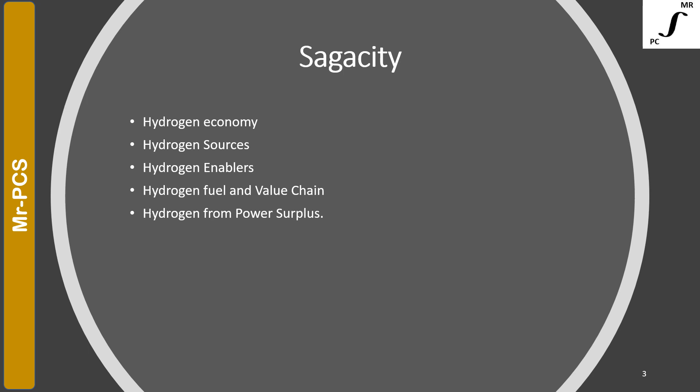It is also interesting to understand how hydrogen is compared with natural gas and what challenges it imposes on the entire value chain. After this basic knowledge, it will be easier to grasp why there exists linkage between hydrogen and surplus power produced by renewable energy sources. We thereafter shift our focus to understand how hydrogen will impact the economy. We will review a few parameters as forecasted by IEEJ on Japan's economy for the year 2050 with and without hydrogen introduction.

The transition from fossil fuel to low emission fuel will also mean new business models to enable this transition, and we will review some of those details in this section. And then the last two sections are all about the short-term outlook for the next 10 years, and then we will conclude with a one-page high-level summary.

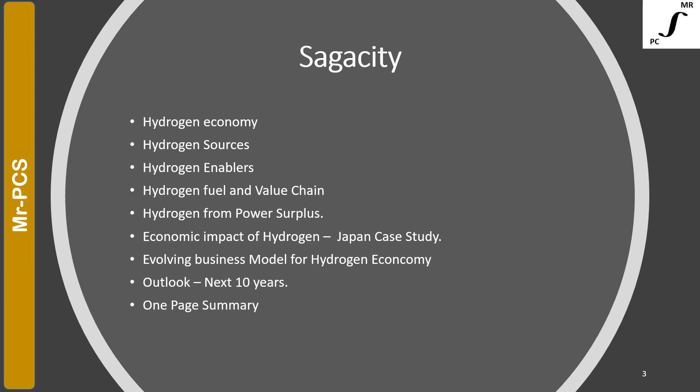The first section is about hydrogen economy. Let's review the definition of hydrogen economy. The term economy is defined as the state of a country or region in terms of production and consumption of goods and services and the supply of money. When the economy is referred to with respect to hydrogen, it means use of hydrogen as a low carbon fuel, particularly for heat, but also for hydrogen vehicles, seasonal energy storage, and long distance transport of energy.

This, in a sense, means significant usage of hydrogen in our daily life, and then it becomes an essential parameter to drive the country's economy. The prospect for hydrogen economy is also due to global warming, which calls for transition from fossil fuel to zero emission alternatives like hydrogen. Pure hydrogen-based technologies offer negligible emission.

The term hydrogen economy was coined by John Bockris during a talk he gave in 1970 at General Motors Technical Center. The concept was proposed earlier by geneticist J.B.S. Haldane. University of Michigan has proposed hydrogen economy to nullify the negative impact of hydrocarbon fuel, as fossil fuel releases carbon to the atmosphere, which results in greenhouse gases.

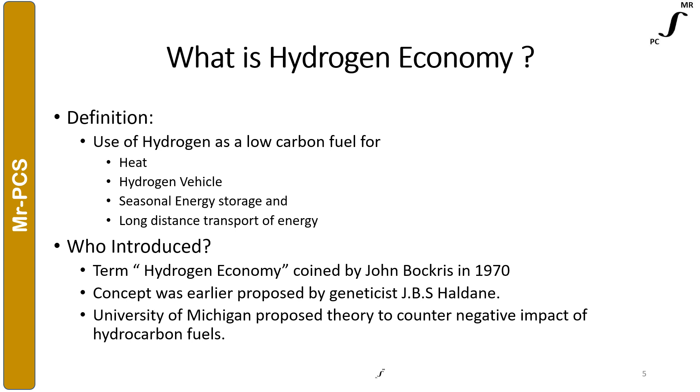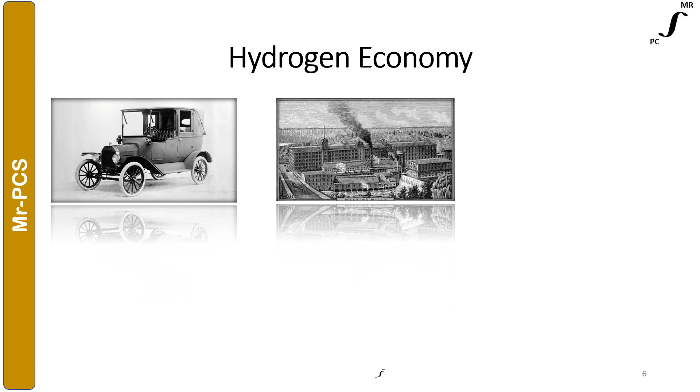In 1900, conventional cars were developed, but there was no infrastructure for gasoline. Yet the conventional car became a success due to improving transport efficiency, which resulted in economic growth, and the infrastructure was then developed to meet such demand. Today we are in a situation where the economy is dependent on fossil fuel, which is finite, and life is unimaginable without fossil fuel. However, all this is resulting in global warming for the planet Earth.

Hydrogen is abundant on planet Earth and it can be produced from multiple sources. It's an energy carrier and not an energy source, and can be used for powering vehicles as well as industries and residences. So, what's stopping us from using hydrogen if it is the most abundantly available resource in the universe? The challenge is to produce it economically and in an environment friendly manner.

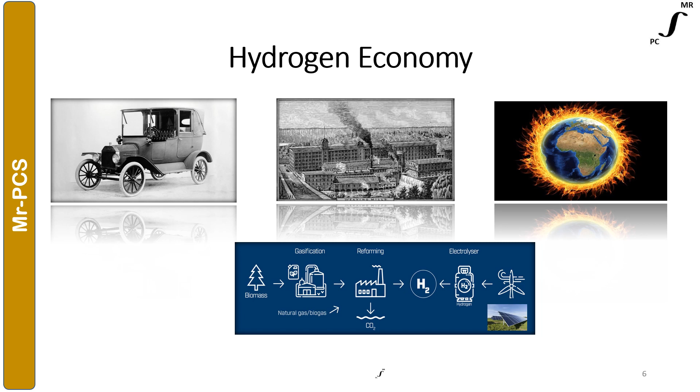The next few slides will address some of these questions: how hydrogen is produced, how it is transported, how it will impact the country's economy, and what we see in the next 10 years. Hydrogen is abundantly available in the universe. In this section, we will review the most common ways of deriving hydrogen from other sources.

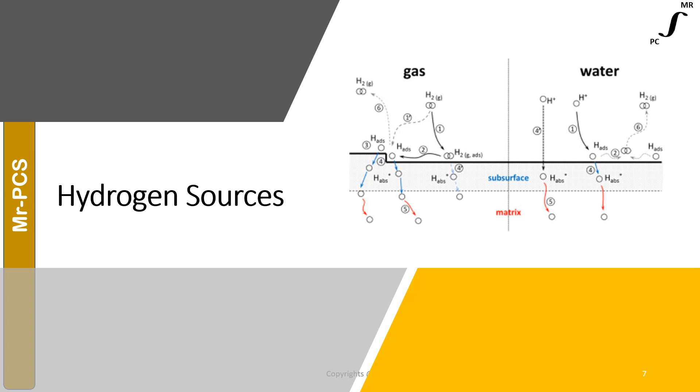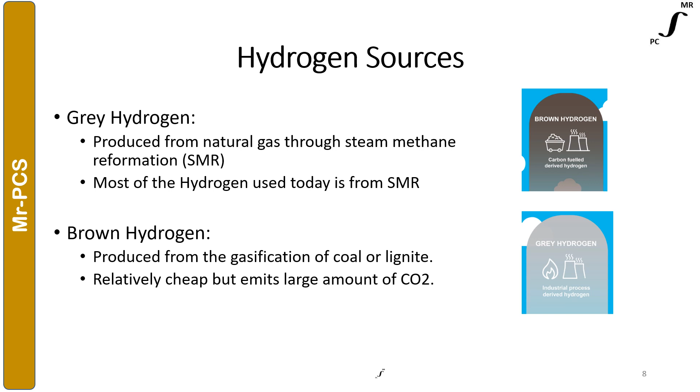The sources for hydrogen production are as listed in this slide. The first and the most common way to generate hydrogen is steam methane reformation. Most of the hydrogen produced today is through steam reformation methodology. Hydrogen produced this way is called gray hydrogen. The next category is called brown hydrogen. In this methodology, hydrogen is produced through gasification of coal or lignite. This is a relatively cheap way to produce hydrogen, but it emits a large amount of CO2.

Blue hydrogen. In this methodology, hydrogen is produced through natural gas, and coal is also included. This method results in emission while generating hydrogen, which needs to be taken care of through carbon capture technology. Green hydrogen is the cleanest form of hydrogen. It is produced from the electrolysis of water. The entire process is powered through renewable power sources like solar or wind, which have zero carbon. It is clean and the most ideal way, but also the most expensive way of producing hydrogen.

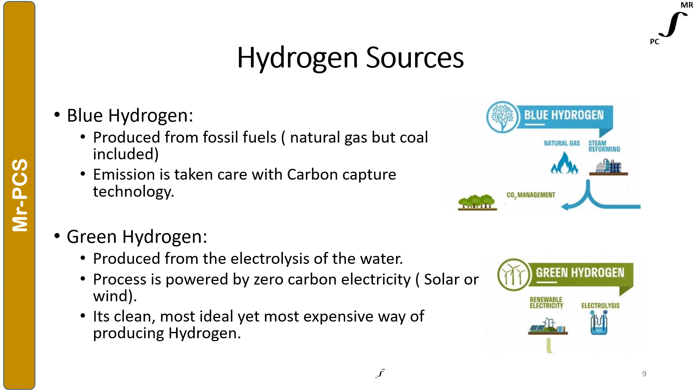As seen in the earlier slide, hydrogen can be produced from fossil fuel and biomass or from water and various other sources. This slide further provides additional information on hydrogen sources.

Natural gas is the most common source of hydrogen production, and steam methane reformers are generally employed to produce hydrogen for industries and refineries. As of today, 75%, which is around 70 million tons of hydrogen, are produced using 205 billion cubic meters of natural gas, which is 6% of global natural gas use.

Coal comes next due to abundant availability in China. Hydrogen produced through coal gasification accounts for an estimated 23% of global hydrogen produced and uses 107 million metric tons of coal, which is 2% of global usage. Biomass and electricity account for the remainder of hydrogen production.

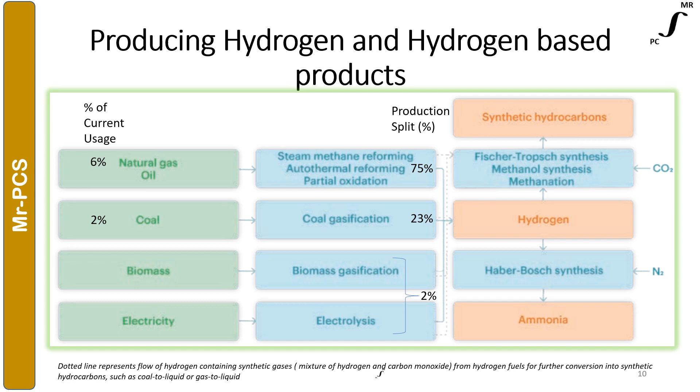The process of making hydrogen through steam reforming technology is mentioned in this slide. Steam methane reforming, abbreviated as SMR, is the most common technology to produce hydrogen from natural gas at large scale. SMR is likely to remain the dominating technology even in the near future because of favorable economics and the large scale of steam methane reforming processes in operation as of today.

High temperature steam around 700 to 1000 degrees Celsius is used to produce hydrogen from methane sources such as natural gas. Methane reacts with steam under 3 to 25 bar pressure in the presence of a catalyst to produce hydrogen, carbon monoxide, and a relatively small amount of carbon dioxide. Steam reforming is an endothermic process, meaning heat must be supplied to initiate the reaction.

Subsequently, in the water-gas shift reaction, carbon monoxide and steam are reacted using a catalyst to produce carbon dioxide and more hydrogen. In a final step, pressure swing adsorption, carbon dioxide and other impurities are removed from the gas stream, leaving essentially pure hydrogen.

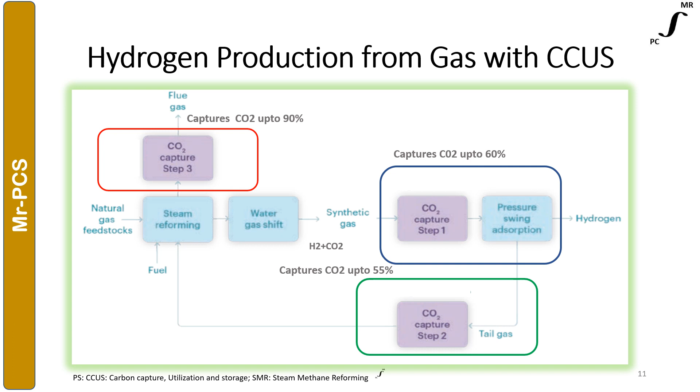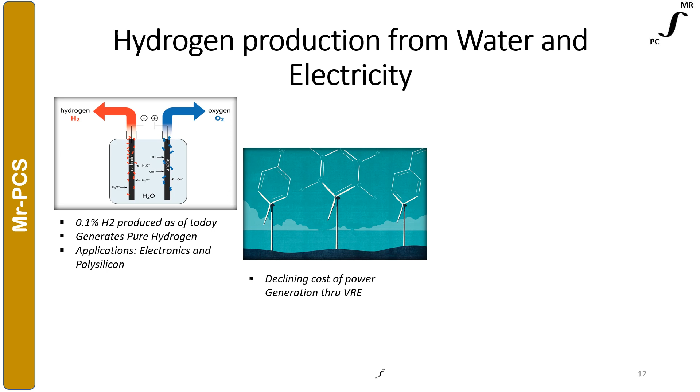Declining cost of electricity produced through renewable sources like wind and solar offers the opportunity to produce hydrogen at lower price, as this surplus low cost power is used for electrolysis to generate hydrogen. Around 9 liters of water can produce 1 kg of hydrogen and 8 kg of oxygen, which can be used for healthcare and industrial sectors.

This means for producing today's hydrogen consumption of 70 million tons of hydrogen, it will need 617 million cubic meters of water, which corresponds to 1.3% of water consumption of the global energy sector as of 2019, or roughly twice the water consumption for hydrogen through SMR, which is around 345 million cubic meters.

Considering the huge water consumption, generally sea water is used for producing hydrogen instead of fresh water. Electrolyzer technologies like alkaline, proton exchange membrane, and solid oxide electrolysis cells are used to produce hydrogen.

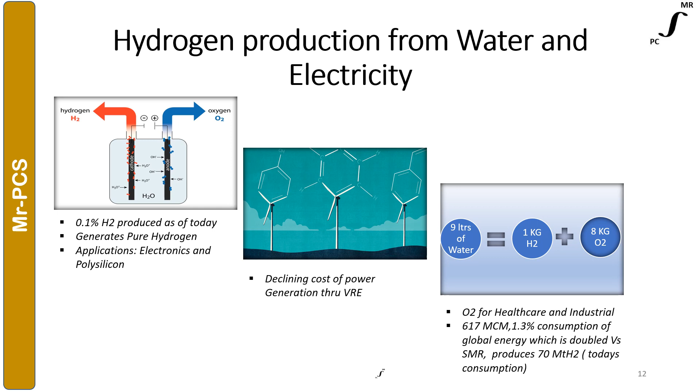Hydrogen production results in CO2 emission of about 19 tons of CO2 per ton of hydrogen, which is twice as much as natural gas. It is necessary to use carbon capture technology if hydrogen is generated through this process. Hydrogen to carbon ratio is low, around 0.1 to 1, as against 4 to 1 from methane. This low ratio brings challenges for CCUS, as the gas also has other impurities like sulfur and nitrogen.

The synthesis gas obtained from the gasification of coal could be used to fuel a combined power plant, and when used with CCUS, it can produce low carbon electricity. When water gas shift units are added, synthesis gas can be used to produce more hydrogen. The decision to produce hydrogen or electricity could be taken based on the profitability, which is based on demand.

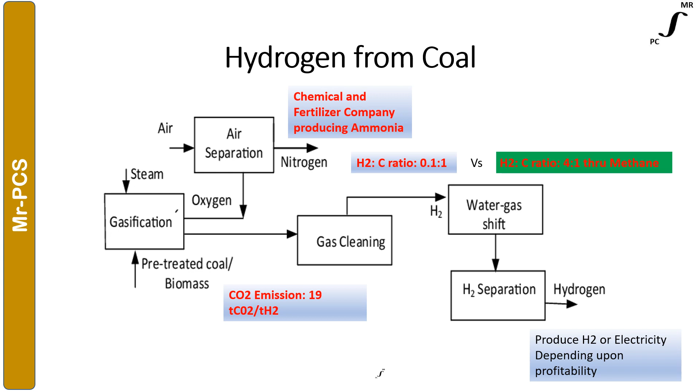The biogas is treated again to produce hydrogen. This process of generating hydrogen is expensive as compared to solar or wind-based electrolysis methodology. Hydrogen production from biomass with carbon capture and storage would result in negative emissions, which will play a significant role in future.

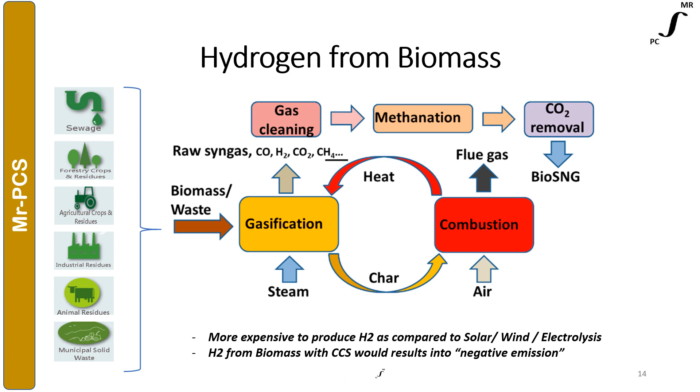Hydrogen safety: hydrogen is colorless, odorless, and tasteless. This means specific sensors or odorization is needed to sense hydrogen in our surroundings. Gas network collaborators are working to create guidelines for injecting hydrogen into natural gas pipelines. Work has already started to define safety standards for hydrogen within homes, determining hydrogen purity for residential and industrial usage, safe ways of producing hydrogen, and defining safety protocols for transporting hydrogen.

Another factor is carbon capturing and storage. Mass production of blue hydrogen is dependent on the use of carbon capture and storage technology. As of now, 23 large-scale facilities are operational all over the world, capturing 40 million tons of carbon per year. Deploying CCS at large scale will make blue hydrogen production attractive for natural gas producers. As of today, it is cheaper to release the carbon than to capture the carbon.

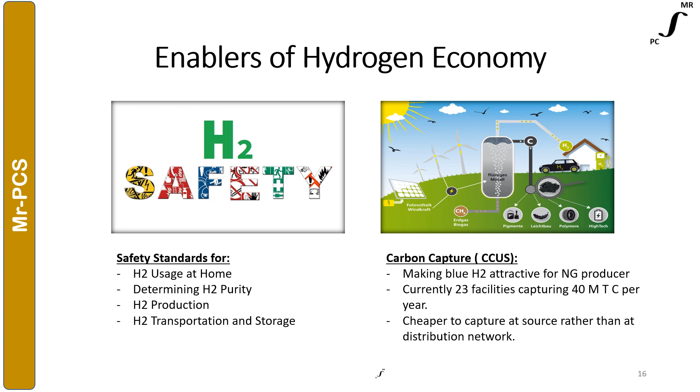Another important factor is building infrastructure suitable for hydrogen usage. Hydrogen may need to be operated at different pressure, and it may have adverse impact on equipment material. It may be needed to check the compatibility of the equipment with hydrogen gas, and all this means more research and investment in infrastructure.

As per Hydrogen Council, around $280 billion investment is needed till year 2030 to realize the full hydrogen role in energy transition. It is estimated that around 40% of investment will be towards hydrogen production, around 30% into storage, transport and distribution, 25% for product development and manufacturing, and the balance towards developing an entire new business model to support this transition.

Many countries use natural gas for various applications, and its infrastructure can be modified to use hydrogen. This will avoid investment towards building separate infrastructure for hydrogen. It is estimated that even blending 5% hydrogen into natural gas will significantly boost hydrogen demand and could spur further investment.

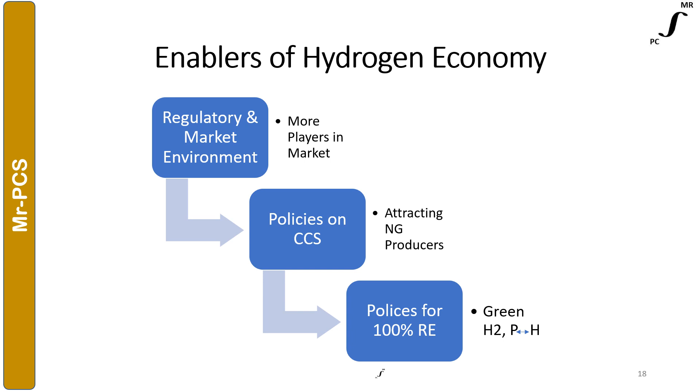In this section, we will see how hydrogen is compared with respect to natural gas, and what are the possible ways of collecting and bringing hydrogen to the market.

Hydrogen-based fuel and feedstock can be produced from any source of hydrogen, whether electricity, biomass, or fossil fuel. Ammonia is like a chemical feedstock, or can be used as a fuel, which is made up of hydrogen and nitrogen.

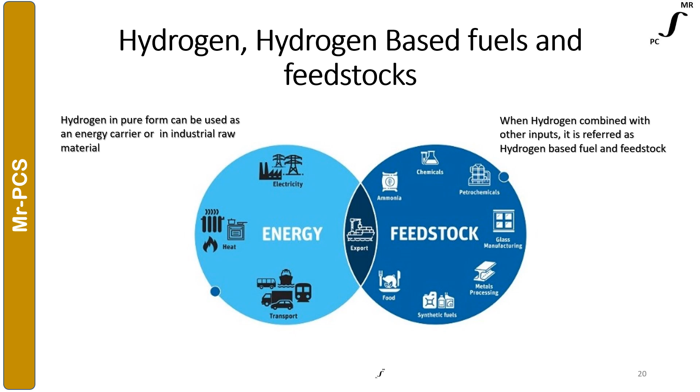Let's understand the hydrogen gas properties with respect to natural gas. Hydrogen contains more energy per unit of mass as compared to natural gas or gasoline, making it attractive for the transport sector. Energy per unit of mass is around 120.1 megajoule per kg, and that's the LHV figure, which is 3 times that of gasoline.

Hydrogen is the lightest element and has low energy density per volume, which means more hydrogen needs to be moved to get equivalent energy from other sources. This can be achieved using larger or faster flowing pipelines and larger storage tanks.

Energy density of hydrogen is one third of natural gas. Hydrogen is just 1/10 of natural gas comparing gas density, and 1/6 of natural gas considering liquid density. The density of liquid hydrogen is 70.79 kg per cubic meter at minus 253 degrees Celsius at 1 bar.

Hydrogen can be compressed, liquefied, or transformed into hydrogen-based products that have higher energy density, but this transformation consumes some of its energy. The boiling point of hydrogen is 90 degrees Celsius below LNG, which stands at minus 252.76 degrees Celsius at 1 bar.

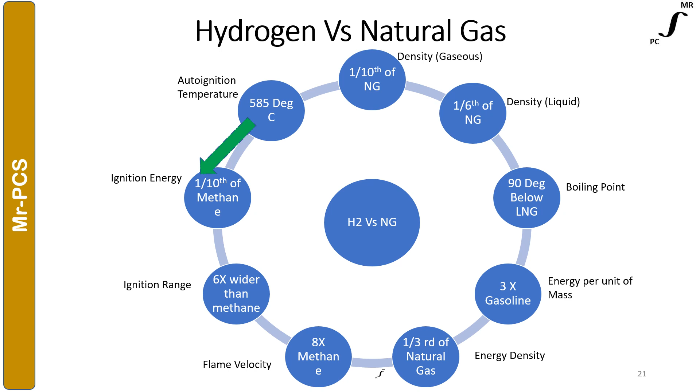Various options with underground facilities are available to store hydrogen. Long distance transmission is extremely difficult due to lower energy density. Compression, liquefaction, or incorporation of hydrogen into higher molecules are the possible options being explored for long-distance transmission.

Blending hydrogen into natural gas infrastructure will reduce the investment in building infrastructure as well as boost the consumption of hydrogen. For overseas transportation, hydrogen has to be liquefied or transported as ammonia or liquid organic hydrogen carriers.

Pipeline is the cost-effective way of transporting gas for high consumption. The current style of transportation through trucks carrying hydrogen as a gas or liquid will remain the main distribution channel for the next decade. In some countries, it will be cheaper to import hydrogen rather than produce it in-house.

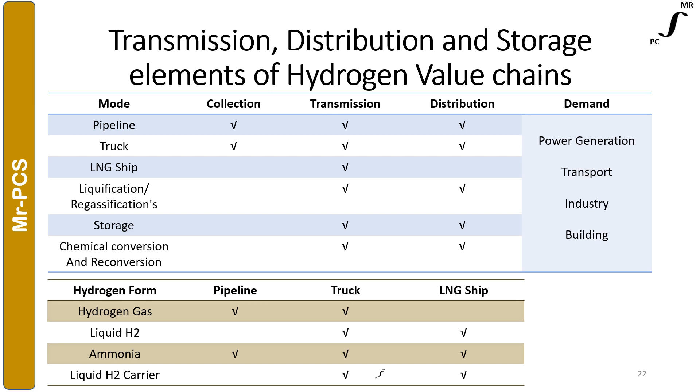In this section, we will analyze various scenarios for utilizing surplus power when demand doesn't exist.

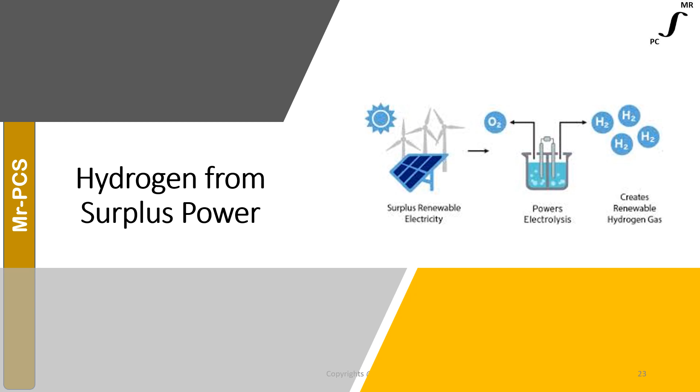Challenges with surplus power are immense. Variable energy sources like solar and wind generate power depending upon whether sun is available or wind is blowing. The energy thus produced is irrespective of demand. The energy produced at zero cost may need to be curtailed if demand doesn't exist. There's also a chance that demand exists but variable energy sources are not in a position to generate power. Hence, the most obvious action is to store excess power produced and utilize it when demand exists.

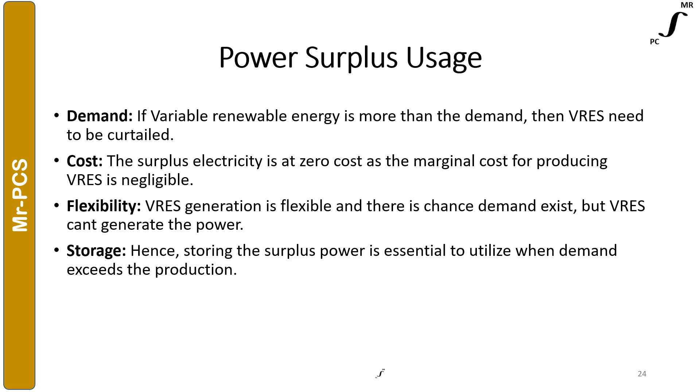The options are: no conversion, which also means wasting the energy produced when demand doesn't exist. Second is convert surplus power to heat. Third is store the power. Fourth is convert surplus power to hydrogen.

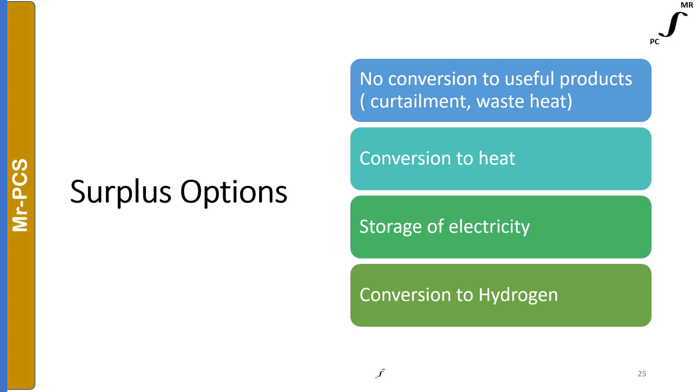Let's first explore the option of storage of electricity. To understand this concept, we need to be aware of energetic cost. Energetic cost means total amount of fuel and electricity required to build and operate the storage technology.

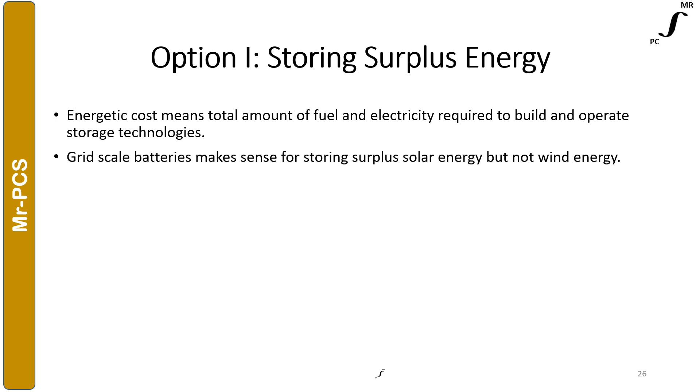Based on research done at Stanford University, solar power can be stored for grid-scale batteries, but the same option is not so attractive for wind power. The reason is batteries with high energetic cost consume more fossil fuel and therefore release more carbon dioxide over a period of lifetime. The amount of energy required to build a solar farm is equivalent to building each of the five battery technologies.

Storing surplus wind energy negatively impacts energy return on investment up to 20% for lithium-ion batteries and up to 50% for lead-acid batteries. Higher battery life would improve energetic performance and will make energy storage options attractive.

With this as a background for storage options, let's analyze the levelized cost of energy for heat options versus energy storage options. In our next slide, we will review levelized cost of energy for heat options versus energy storage options.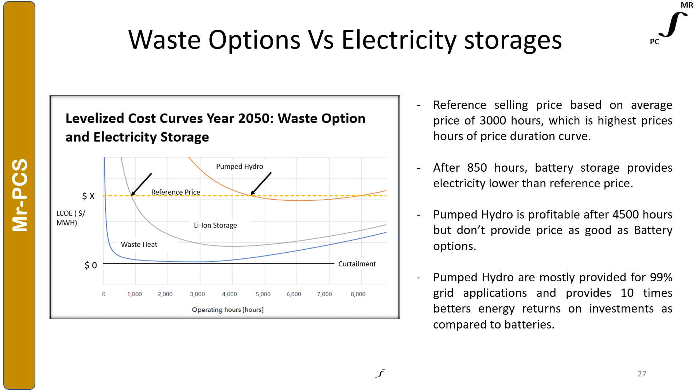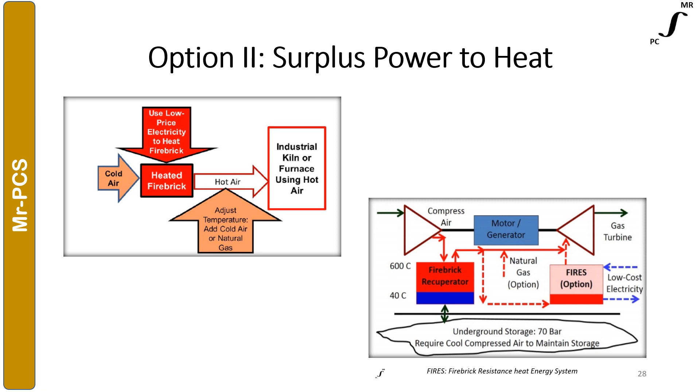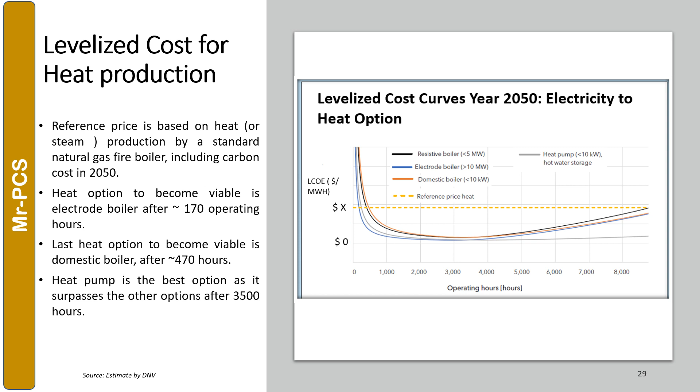This slide shows levelized cost calculations for heat production. Reference price is based on heat or steam produced by natural gas boiler including carbon cost prices in year 2050. Heat options like electrode boiler become viable after 170 operating hours. The last heat option is the domestic boiler, which becomes viable after 470 operating hours. Heat pump is the best option as it surpasses after 3500 operating hours.

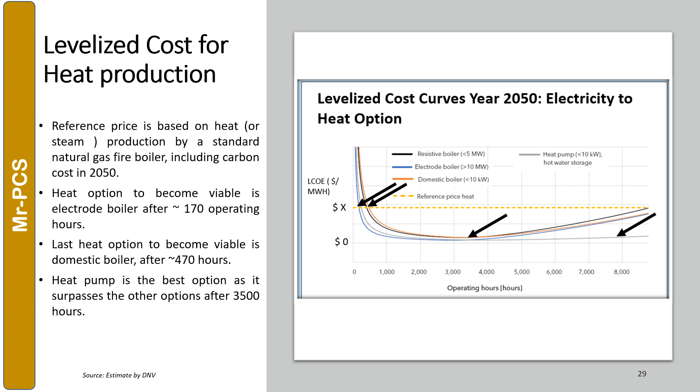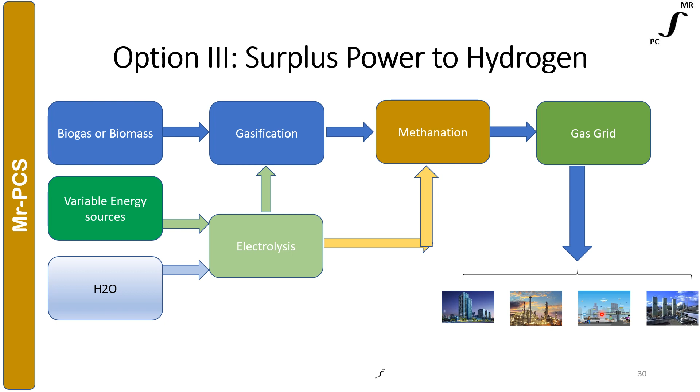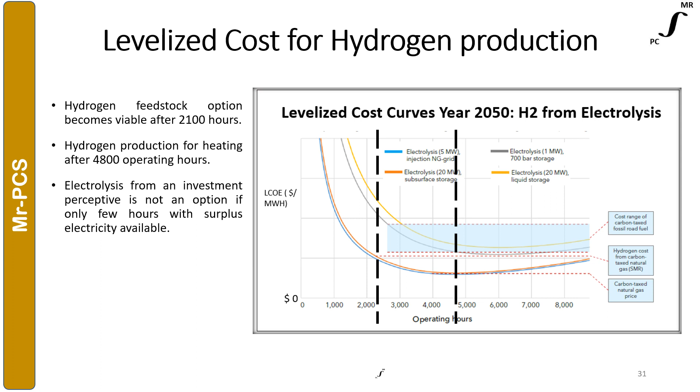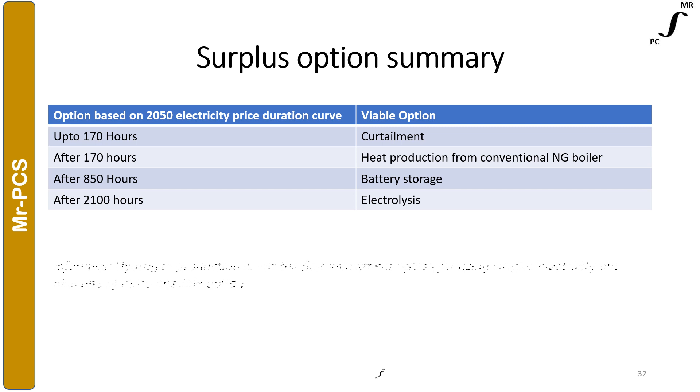The merit order is based on levelized cost analysis and shows the order to invest in surplus options, not the order in which they will be dispatched once built. So hydrogen is not the first investment option. However, considering the cyclic nature of variable energy sources and the demand which may not occur as per power production, the best option appears to be hydrogen storage.

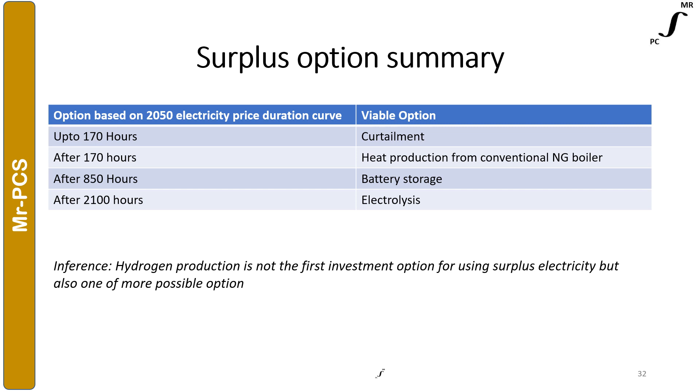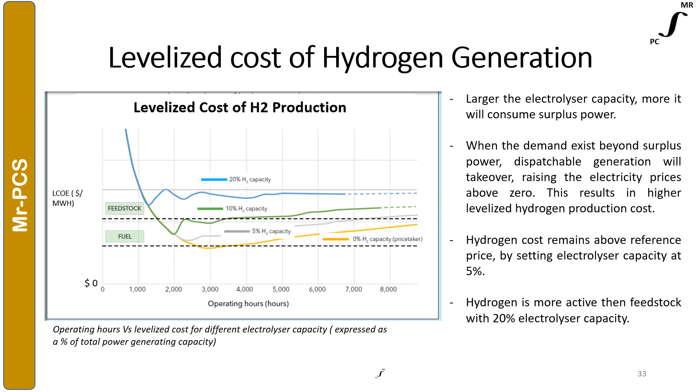So the overall conclusion is, if the required electricity volume for electrolysis is significant compared to the total market volume, the electricity price will increase, which means electrolysis will become a price setter. This ultimately will have a negative impact on hydrogen production cost. As the production cost reduces, it will become an integral driver for economic growth, as hydrogen will fuel various sectors.

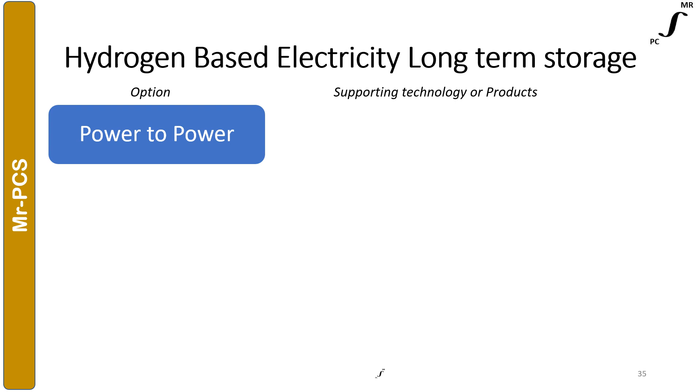So countries in future will see hydrogen being an essential part of life. The future economy will be driven by power-to-power application, which means renewable electricity will be transformed to hydrogen and then back to power via fuel cells or gas turbines. Power to gas through electrolysis will have wider application. Power is transformed to fuel and then used for the transport sector. Electricity is again transformed into hydrogen and then used as a feedstock, which can be used for the refining industry.

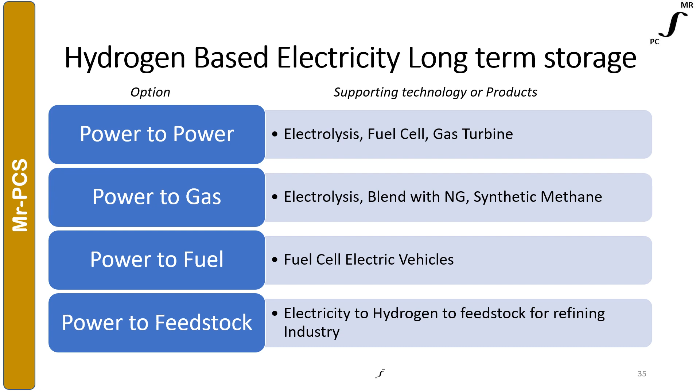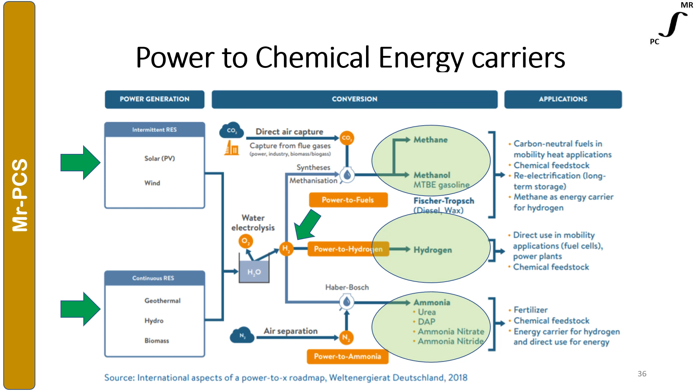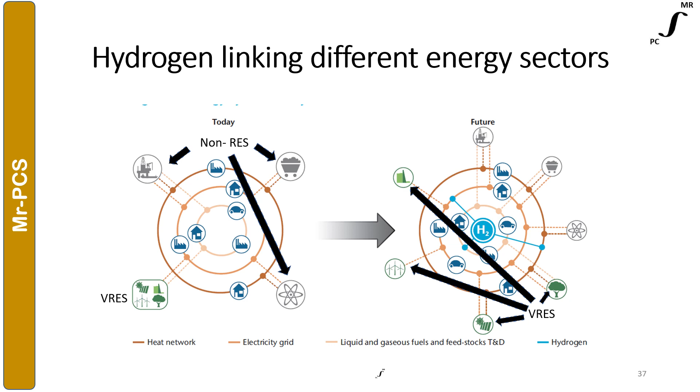Let's see how transitioning from fossil energy to hydrogen is likely to impact Japan's economic growth. The learning for the case study is based on documents published by the Institute of Energy Economics Japan. The information is incorporated to understand the impact of hydrogen introduction on various parameters which drive economic growth.

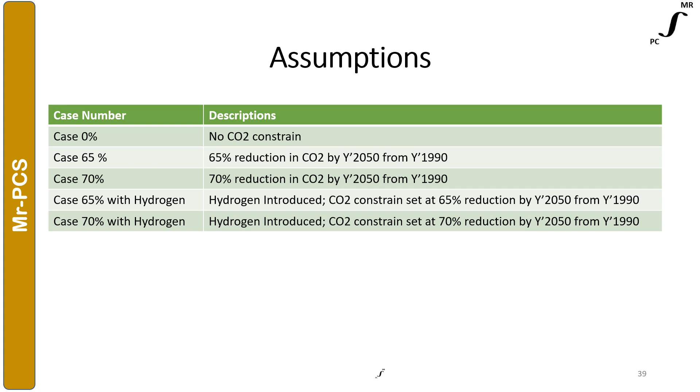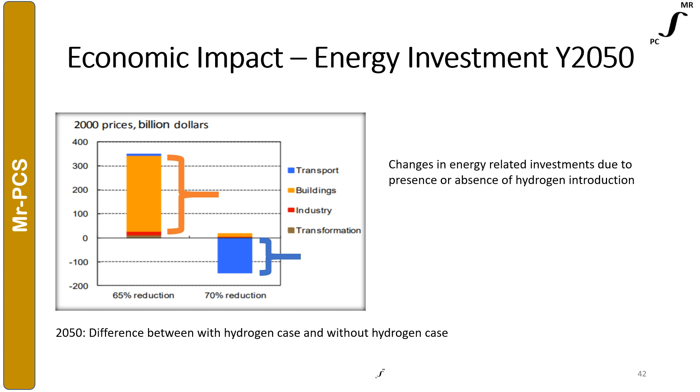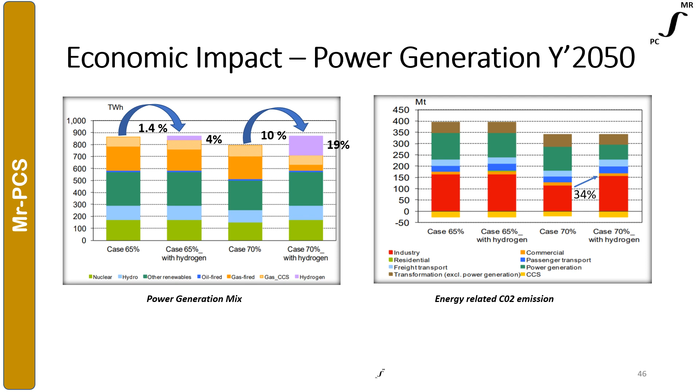This graph indicates energy-related CO2 emission in 2050 where CO2 constraints are set. CO2 emission reduces due to use of hydrogen-fired power generation. In case 70%, there is a significant decrease of CO2 in power generation sector, whereas in the industry sector, CO2 increases by 34% compared to the case without hydrogen. As shown earlier, economic growth is mitigated by the use of hydrogen. However, CO2 emission increases due to expanding production activity in the industry.

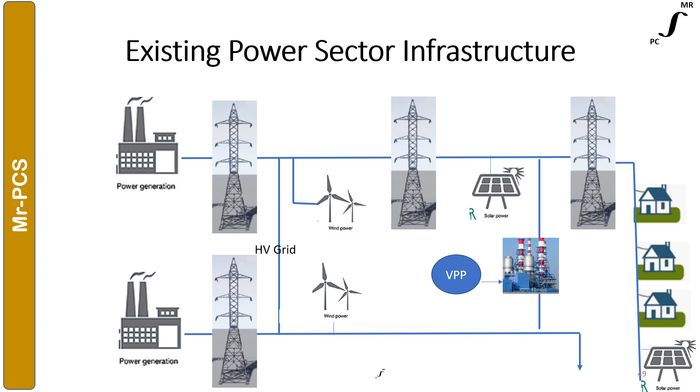The future power system will differ significantly due to introduction of hydrogen. Market will have two energy carriers, electricity and hydrogen. There will be close working between variable renewable energy power plants and hydrogen manufacturers. The excess power will be simply converted to hydrogen, stored and utilized during peak demand. The hydrogen will also be produced through other sources like SMR, coal gasification, biomass, and the hydrogen will be fed to the gas grid. The hydrogen production is likely to be close to the consumption point to reduce transportation cost.

Hydrogen and natural gas will be supplied through same natural gas pipeline for residential, commercial and industrial sector. The gas and electricity grid will provide redundancy for each other. Investment in bigger fossil-based power plant will be reduced as the renewable contribution is set to increase. Excess renewable contribution will be used to produce hydrogen.

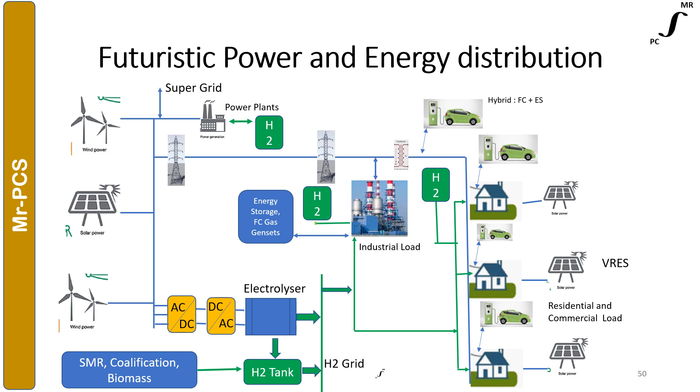This slide elaborates structural and operational changes which will drive the need for new business model. Supergrid concept will take shape to improve power reliability as the contribution from renewable sources increases. Grid will be multidirectional and protection will also need to be multidirectional, and mostly supergrid will be direct current transmission. This will bring significant structural changes in power generation and transmission and distribution network. Power plant manufacturer and hydrogen manufacturer will work in close coordination so that electrolyzers are automatically turned on when power demand vanishes.

Consumer will get transformed into prosumer, generating and consuming electricity at the same time due to additional localized solar power production at home and commercial property. Role of aggregator will emerge and will enable prosumer to get direct benefit of wholesale prices. Village and remote island will be powered by microgrid, essentially delinked from main grid, and the pricing will be determined based on local resources, for example gas availability and renewable source contribution.

Industries will be located near coastal location and are likely to use hydrogen-based fuel cell technology for power generation. Market will transition from selling kilowatt hours to energy as a service. Service provider will provide comfortable room temperature, solar PV on roof, battery investment, EV charging station, along with the supply of hydrogen or electricity, or simply signing agreement for the industrial sector based on the availability guarantees of power.